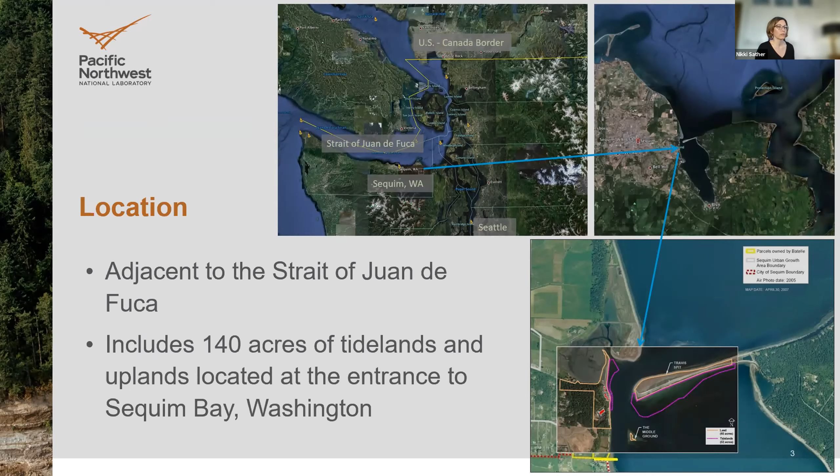Our facility sits on 140 acres, which includes 65 acres of tidelands. You can see in this inlet here, down at the bottom, this purple polygon shows our tideland coverage. Within the next year or so, we expect that DOE is going to purchase a lot of acreage here, about 117 acres, including the tidelands, and so that means the facility will be transitioning to a federally owned facility.

Our campus is made up of two different areas. The upland area sits on a bluff, about 100 feet above sea level. The shoreline facilities are built adjacent to the beach, and many of the facilities along the shoreline are relevant to supporting the marine energy testing that we do.

You will see in this infograph that we really consider the adjacent water body, this 5,000 acres in Sequim Bay, as part of our research platform. So we certainly do what we can to maximize this as a research space.

In terms of our staff, our numbers grow and contract, and that's certainly true in spring and summer when we see a heavy influx of students and visiting scientists. But on average, we have about 80 researchers on campus. We are a technically diverse group of folks, so our scientists include biologists, ecologists, engineers, chemists.

We have a number of indoor and outdoor capabilities that support our testing and experimentation. Our pier and our floating dock provide access to our vessels, but they also provide a platform for deployments that require data cables and other power needs. Our wet labs provide access to either freshwater or seawater that can be flow through or filtered. This is particularly relevant to things like biofouling and biocorrosion testing, scaled prototype testing, as well as component testing.

We use our dry lab spaces to support activities related to the design, test, and build of components, sensors, platforms. Our Arctic lab can be retrofitted to perform seawater tank testing under freezing conditions, and I'll share a few examples of that later on in the slide deck. And then lastly, we have a number of tanks of various sizes outside that offer opportunities for mesocosm experimentation.

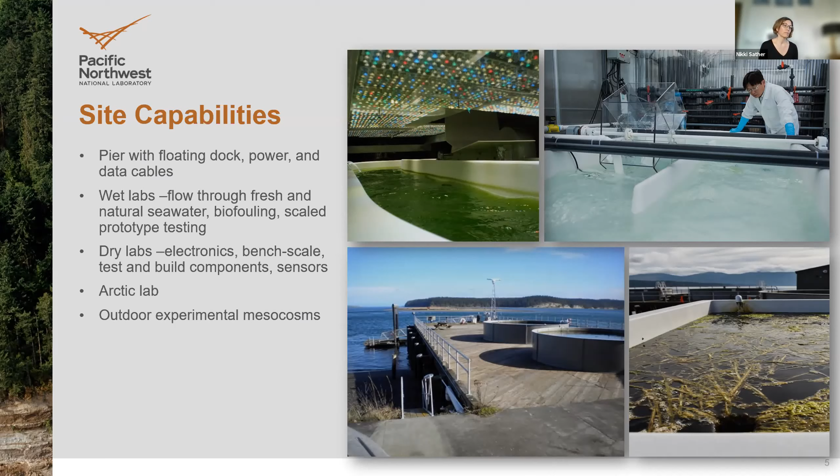We are in the process of adding several new capabilities to MCRL that I wanted to share with you today. We have plans to install a cabled array that will support deployment of equipment and devices that require underwater power, as well as data connection. You can see this illustration on the slide of the cabled array. It's going to be located close to our facility, which offers some inherent convenience. In addition, the location can accommodate opportunities for testing either in high current or not, depending on what the research needs are.

The marine energy battery storage system is being designed. It'll be located on our shoreline facility, and it will be designed to connect devices via that cabled array. You might think an example of that could be a turbine. However, the battery can also be tested independent of power generation, meaning various simulations and modeling.

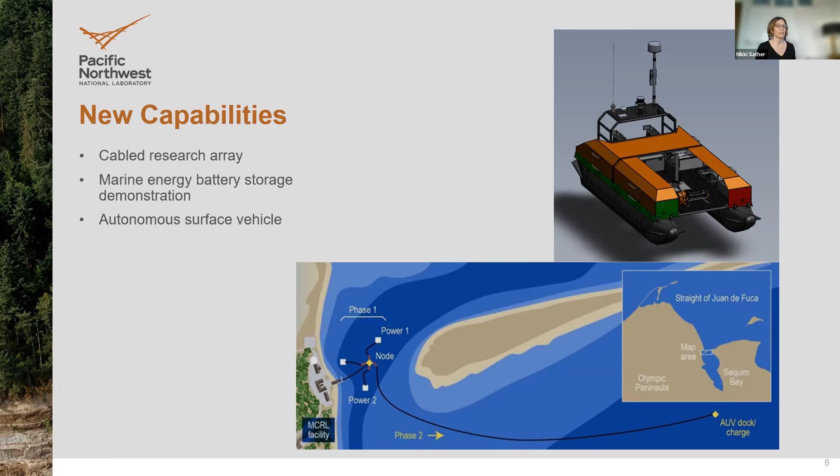And then lastly here, we have this autonomous surface vehicle. The rendition that you can see here on the slide is going to be designed as a testbed for autonomy, as well as a proxy for marine transportation—so testing of docking and charging capabilities, for example.

Our dive team is made up of scientists. This means that not only do they understand the technical aspects of diving, they have a deep appreciation for what it means to perform experiments and collect high quality data underwater. Of their many skills, I love that we highlight their ability to be cooperative research targets.

This means that, on request, they will pretend to be seals underwater, if you ask nicely. But really from a technical perspective, some of our divers are trained to use rebreathers, so they emit fewer bubbles underwater, and they can and have in the past served as underwater targets for different sensing technologies.

This image shows the mouth of Sequim Bay, which we refer to as the channel. Our lab is along the shoreline to the right. You can see Travis Spit is the sand feature on the left. Water depths in the channel range about 12 meters, and in the bay they're 32. Then as you move north out of Sequim Bay, depths increase rapidly in the Strait of Juan de Fuca.

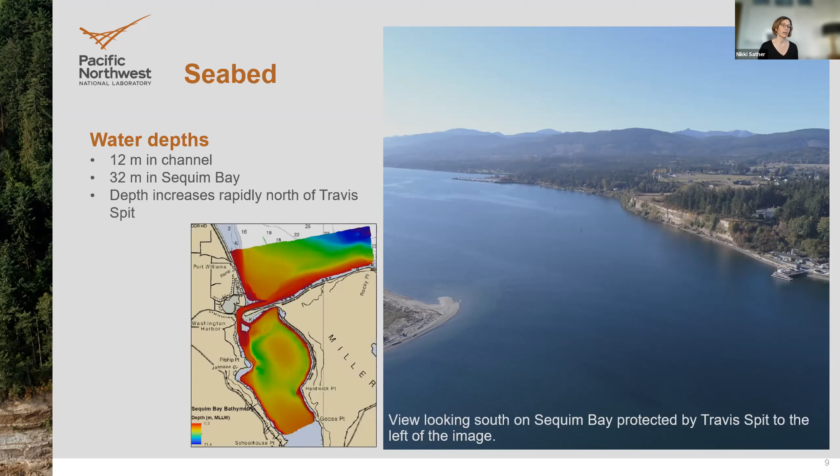These images depict the normalized velocity fields in Sequim Bay. The image on the left is velocity during flood tide, and the image on the right is velocities during ebb tide. Blue is slow, red is fast. Velocities can range anywhere from 0.5 meter per second to 2 meters per second, with instantaneous velocities being much higher. You can see from these images that the location, extent, and intensity can change depending on which tidal cycle you're in.

But there are some areas that are pretty consistent, an example of that is southeast of our dock. These data are useful to us because they help us design experiments and plan deployments. It means we can be dynamic in terms of how we deploy things depending on testing needs.

I would be remiss if I did not talk about permitting. We have 2 pre-permitted areas, one in Sequim Bay and one in Clallam Bay, which is to the west of us. The benefit of having these 2 sites that have federal authorizations and supporting permits is that it allows us to conduct a number of pre-approved activities with very little lead time. This doesn't mean that anything goes. What it means is that we have a general envelope of things that we are allowed to do. So when projects come in the door, we do some careful comparison of scope to what those envelopes are, we make sure everything is aligned, and once we've done this internal verification, we can move forward with testing.

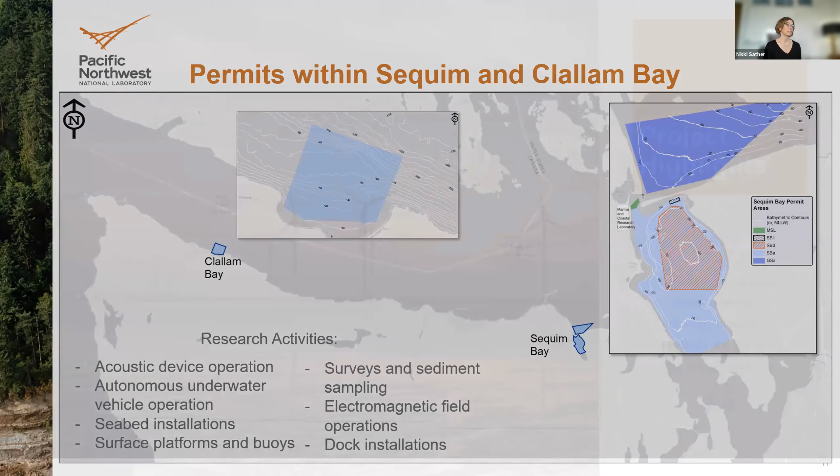I'm going to move on now and share a few details of our teams and our projects that are relevant to marine energy testing. My hope is to adequately amplify this research, but I think you're going to recognize that each one of these slides really could be a talk in and of itself. So I've included some list of names as POCs. If you're interested at a later date for more details, please follow up.

Our coastal modeling group supports marine energy testing and evaluation. Certainly wave and tidal resource characterization and assessment are a key focus area. Other applications of these capabilities include evaluating risks and uncertainty. An example of this could be coupling of hydrodynamic models with underwater acoustics to help with siting and permitting of devices. In the PBE space, these high resolution data sets are relevant to coastal communities and coastal resilience, think hazard assessments, for example.

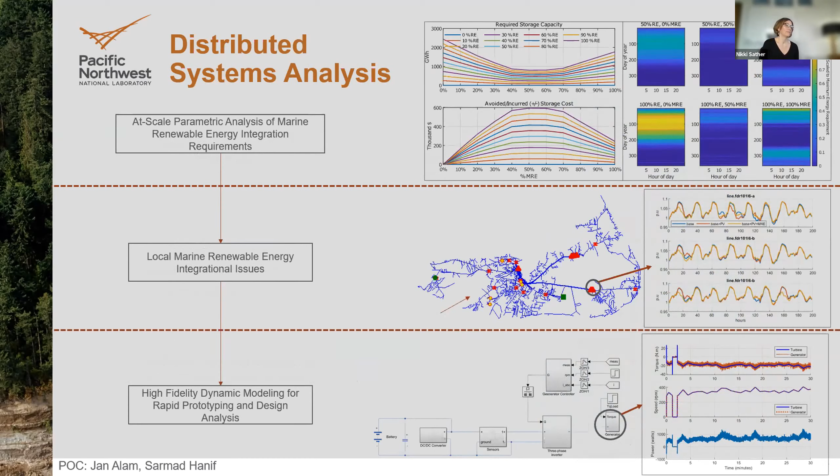PNNL leads the Ocean Energy Systems Environmental Program, which is built on collaboration with 16 nations under the IEA Ocean Energy Systems. I'm sure many of you are familiar with this work. This team brings together experts to disseminate critical information to the industry as well as regulators.

They use a variety of approaches. Some aspects of their work include workshops and forums that bring together experts. I believe there's one being held tomorrow as part of this conference. And of course, there's the State of the Science report, which has been released every 4 years since 2012.

Triton is the DOE initiative that's designed to support environmental monitoring technologies. Ultimately, the goal of this work is aimed at helping reduce barriers for marine energy deployment. This team has been incredibly busy this summer, out and about doing field testing. They're focused on developing deployment methodologies for marine energy applications, offering a range of expertise in testing and deployment in open water, including at marine energy test sites.

So Matt talked about TEAMER earlier. PNNL is supporting the TEAMER program through a couple of different means. We perform modeling and desktop analyses, bench testing, tank testing, and we are looking forward to open water testing that will soon be added. So currently we are working with developers to understand environmental compliance needs relative to specific device types.

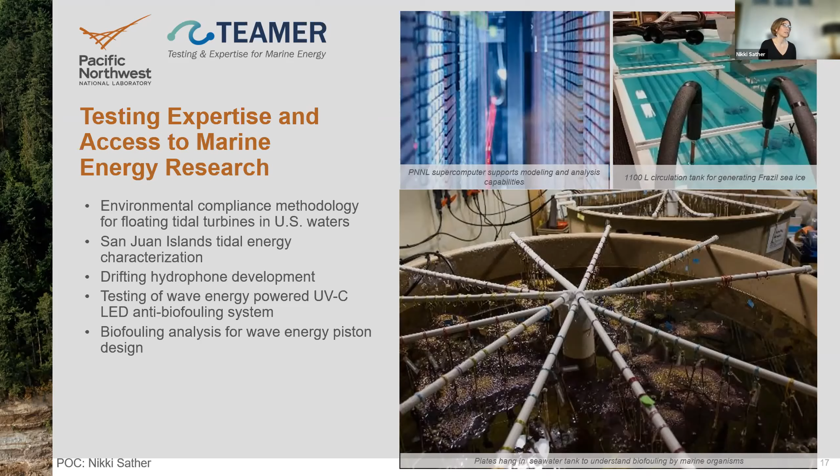I wanted to close with some examples of additional marine energy relevant tests that have occurred at MCRL as of late. These capture our in-water research activities as well as our tank testing. In support of resource characterization work, we recently ran an experiment to evaluate the potential interference of two different ADCP systems running at the same frequency and within close proximity, and that work was done here in Sequim Bay.

In our Arctic lab, we conducted an experiment focused on evaluating the effectiveness of different lithium-ion batteries in freezing conditions. We were interested in determining if wave energy is a more effective way of charging batteries than solar in ocean-based observing platforms in cold climates. We combined this lab experimentation with simulations to evaluate the effectiveness of wave charging.

We also conducted an experiment on polycrystalline diamond bearings as an alternative to steel bearings on marine energy converters. Again, we used our Arctic lab to perform this test, and you can see an image from that experiment on the right here, an ice slurry in the tank. Things were fully functional above that first layer of ice. That test has wrapped up its first phase and is moving towards phase 2 of testing.

In support of the Splash contest for the Ocean Observing Prize, we recently installed a wave measurement buoy at Clallam Bay. We're looking forward to the data that will be collected there. Finally, we have used JSATS tags, an acoustic tag technology developed at PNNL, to track sablefish movement in Sequim Bay. The 3D tracking work was done in support of efforts to develop approaches for reducing uncertainty regarding fine-scale movement of fish in and around turbines.

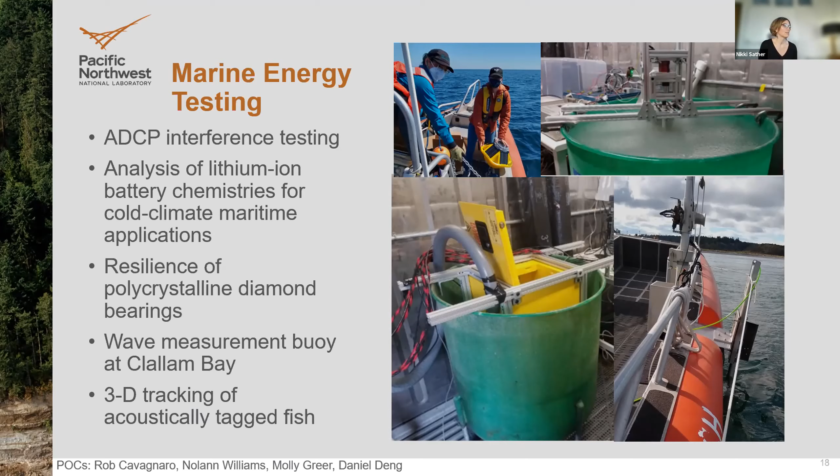So with that, I will wrap it up and say thank you. Thanks to Matt for having us here today, and maybe I'll turn it over to, I think, Bryson's next.

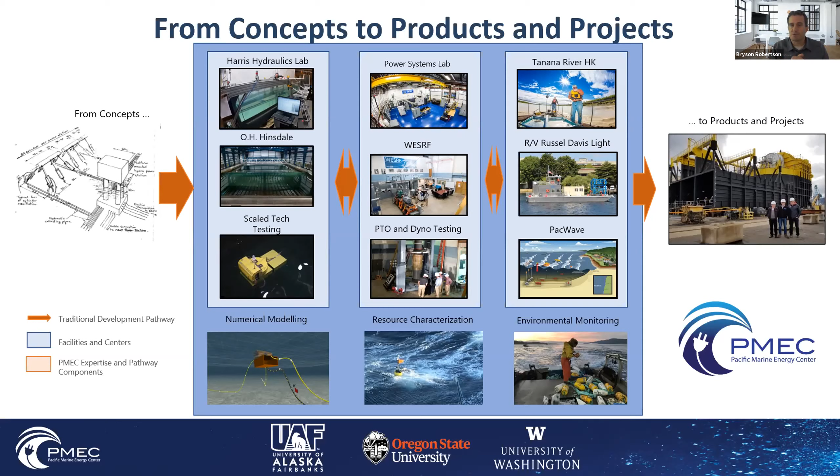So where do we start? Generally we go from our napkin drawing and we move to our computer model.

We've got a huge amount of people and different models we can bring to bear on this problem. I'm not going to get into all the details, because then my 10-minute talk will take 2 hours, but there's a lot of capability and expertise there.

In terms of physical testing facilities that often get the high-level attention across the center, we've got a number of them, whether you're looking to test floating wave energy converters, seafloor-mounted wave energy converters, or tidal devices.

The O.H. Hinsdale Wave Research Laboratory on the left here was established in 1972, and it's a state-of-the-art center conducting both applied and fundamental research.

There are 2 big facilities within Hinsdale, both the large wave flume and the directional wave basin, allowing marine energy technology developers to subject their scaled devices to waves, extreme seas, storm surge, and a host of other environmental factors. There's a number of different things on the TEAMER website.

I'm not going to get into the specifics of each one, but we can go from deep conditions with big waves to directional waves in the other basin, allowing you to test really what you're looking for.

There's actually a group of students who just finished a tour of the O.H. Hinsdale Wave Research Laboratory this morning, where Aquila Power, funded by the TEAMER program, is testing an array of 7 Triton devices.

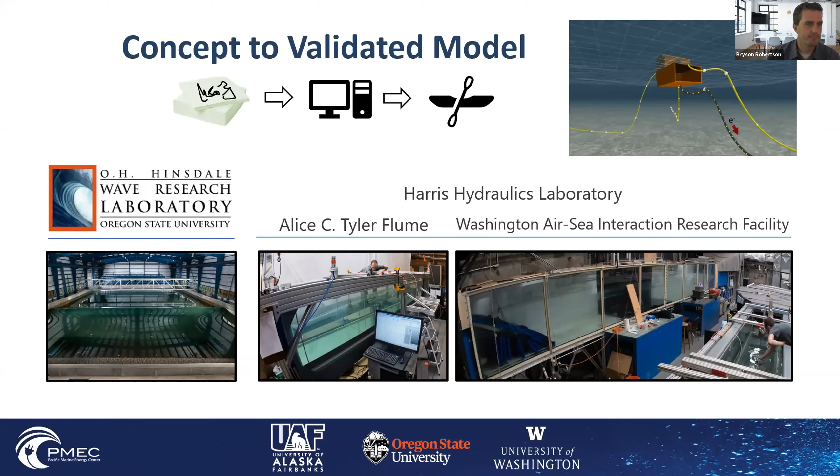Where's my mouse? My apologies, I can't move my slide deck forward.

There we go. As we get through those small scale tests, we start to understand the hydrodynamics, and we start to get some of these results.

Then we need to start to look at individual components and how they integrate with the greater system, whether it's the utility grid, a remote community, an oceanographic buoy, or an underwater vehicle. How do these systems start to work together?

Under the PMEC umbrella, we've got 2 major facilities that we operate: the Wallace Energy Systems and Renewables Facility at OSU, and the Power Systems Integration Lab at ACEP, the University of Alaska Fairbanks.

We serve as one of the highest power university-based energy system labs in the country, with about a 750 kilowatt capacity. There's a number of really great linear test beds, batteries, storage technologies, and hardware-in-the-loop hardware, which really allows that team to move component integration testing forward.

They also have a lot of ability in converter modeling, control development, and power takeoff design, so you can start to see the connection between your components and the testing that happened in the first stage of the modeling.

At ACEP, this facility operates at the same scale as a village power system. So if you're looking to power a remote community or get your device in, this is the scale you're going to be working at, and you can do it in a controlled environment.

So before you go out to the site and have that sort of potentially chaotic field testing setup, you can go to the Power Systems Lab and, in a controlled and flexible setting, start to understand how islanded and microgrids work, and how your distributed generation scenarios play out. Incredible facility.

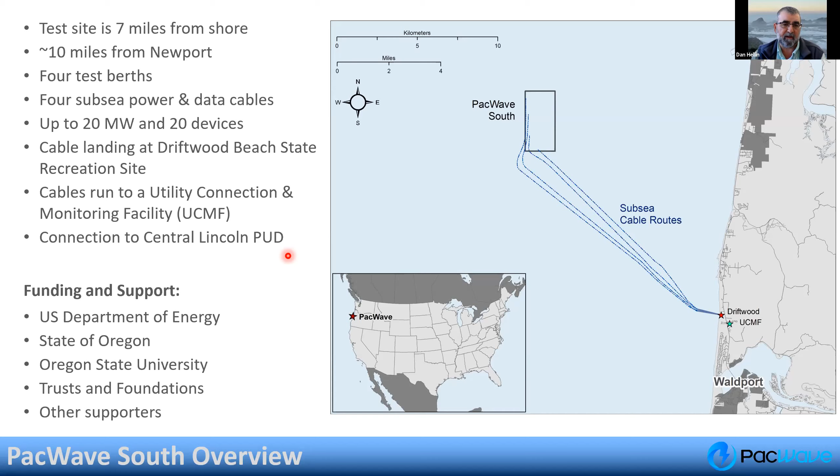Part of the reasoning why this permitting took a significant length of time was partly because we're a test site, so it's very difficult to define what we're going to have out there at any time, and that's complicated for the permitting. Also, similar to what Nikki was talking about, we are pre-permitted for the majority of types of wave energy converters. That doesn't mean we can just go out and do anything, but the majority of types of WECs will not require additional federal permitting to come and test at PacWave. That was an unusual requirement in our permitting and took a long time to hammer out, but we feel that's definitely going to be important for developers.

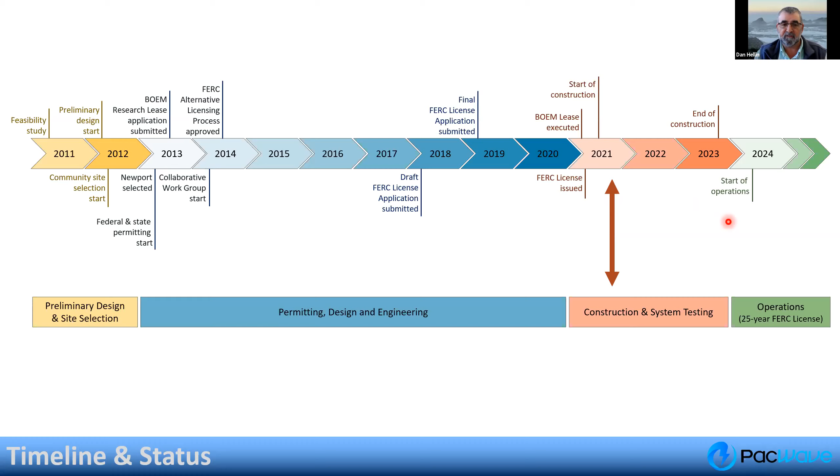I just want to talk a little bit about the construction, where we are and what's going to be happening. We have a couple of early phases of construction underway at the moment. At our cable landing site at Driftwood, there's major construction for our terrestrial infrastructure going on, the horizontal directional bores. That started on June 1 and will go through until early next year, spring of next year. At the same time, we have initial work starting on our utility connection and monitoring facility.

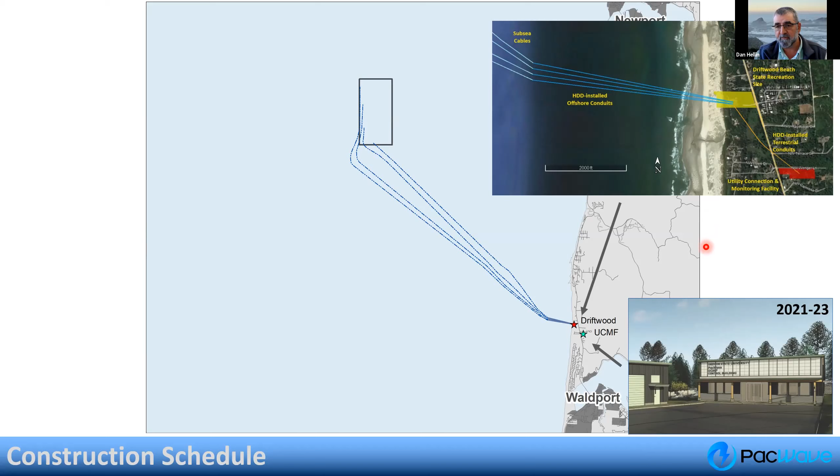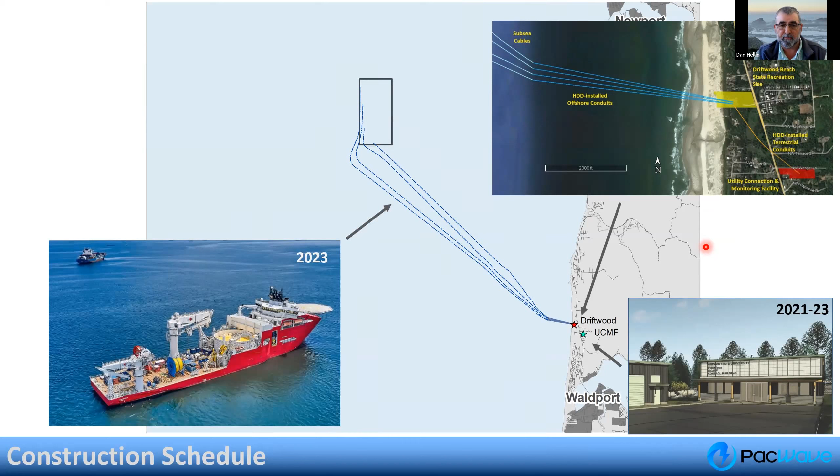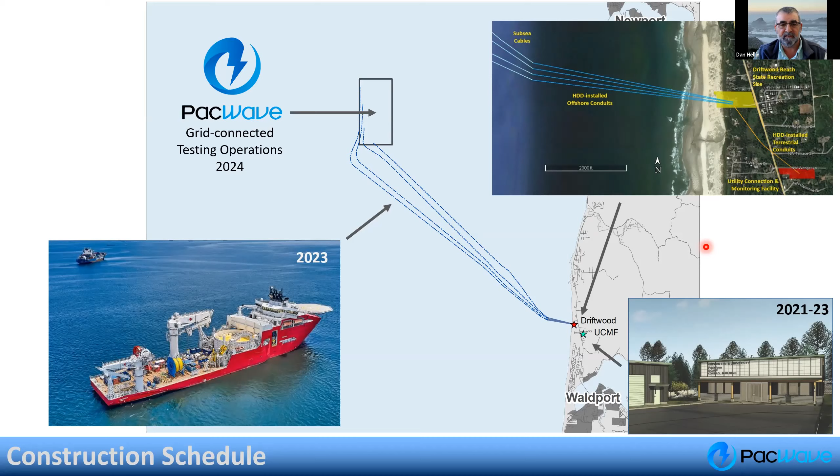What we're doing at the moment is site preparation, upgrading utilities, roadways, grading the site in preparation for the actual construction of the facility itself, which will likely happen in either 2022 or 2023. The real big piece of the project scheduled for 2023 is the subsea cable installation. Subsea cable manufacturing will probably happen next year in preparation for a 2023 install, which will lead us to test operations for grid connected testing in 2024. Other testing can happen in advance of that, but grid connected testing will happen once we have all the cables in place.

So to talk in more detail about the terrestrial infrastructure work that's going on: we're based at Driftwood State Park, started on June 1st, and the major undertaking at the moment is these offshore bores. These are horizontally directionally drilled bores, each going out approximately a mile from shore. The longest bore, the north bore, is 5,308 feet. These bores get lined with steel casing, steel conduit, which will be left in place, and that's what we're going to pull the subsea cables through when they're installed in 2023.

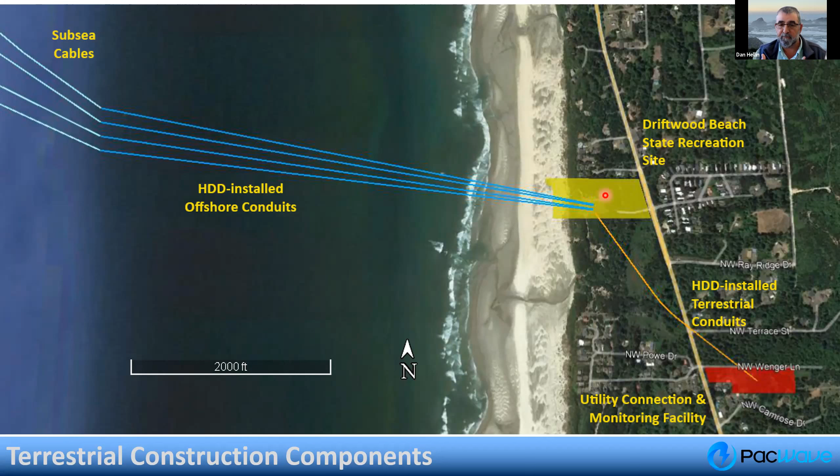So we're currently working on these bores. We have the conduits installed on the north bore HDD1 and the south bore HDD4, and we're currently drilling on HDD2 and HDD3. When those bores are all complete later this year, maybe late next month, we will switch to doing a terrestrial bore between Driftwood and the UCMF facility. And when that's complete, we will rebuild the parking lot at Driftwood and build an underground splice vault where the subsea cables will come in and transition to the terrestrial cables.

So this is a profile of the horizontal directional drill bore plan that's going on at the moment. These are long bores - a mile long bore offshore is a pretty extreme bore to do. What we have here is the parking lot at Driftwood, and the bores go down underneath the beach and the nearshore area and down into this competent rock, this Nye mudstone, that they drill through for most of the bore path offshore, at times about 140, 150 feet below the seafloor, until they curve up and break out about a mile offshore.

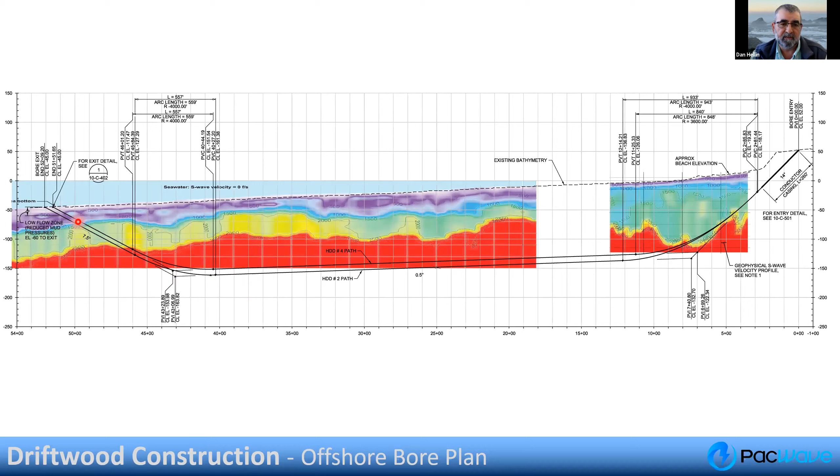Once they've done the bore, then we pull the drill string back and then install all the conduit. So this is from a couple of months ago - this is Driftwood State Park, the parking lot, Driftwood Beach here. There's a pathway down to the beach. We've maintained pedestrian access, even though we've taken over the whole parking lot for the duration of the construction.

What you can see here is two very large drill rigs, horizontal directional drill rigs, in operation. We have two running at a time. In this picture, we have HDD4 heading out this way and HDD1 heading out this way. At the start location, they're located pretty close together - the separation between HDD1 and HDD2 is approximately 8 feet, and the separation between HDD4 and HDD3 is about the same. But the bore paths are diverging, and offshore their breakout points are about 150 feet apart.

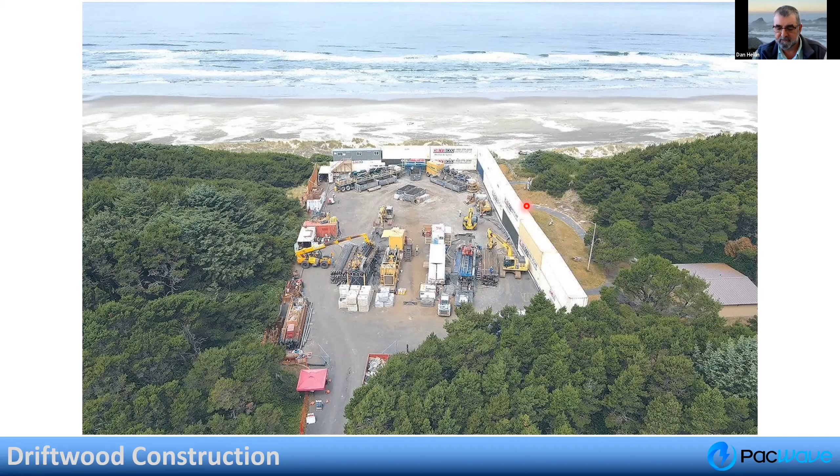Because this coating is critical, protecting it has been quite an interesting challenge for the company during installation, to ensure we can screw all these sections of conduit together without damaging that coating before it's installed. So as I said, HDD1 and HDD4 are complete, and of the other two bores, one is at about 2,400 feet out, and the final bore is at about 1,500 feet as of yesterday.

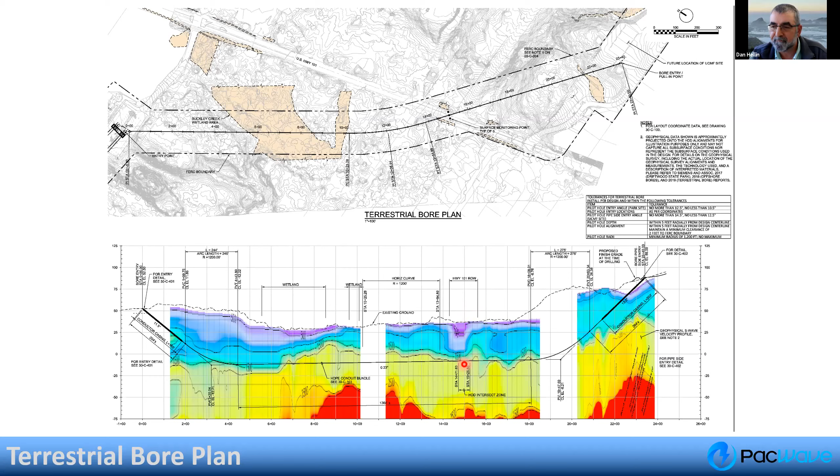So the drillers are actually incorporating an intercept method, drilling one bore from one end and one bore from the other end, intercepting underneath the highway here. The accuracy of their drilling is pretty remarkable. The reason for that bore is to get the power from driftwood to our utility connection and monitoring facility.

This is our architect's rendering of the UCMF facility. This was done by HGE Architects, the company we hired, based out of Coos Bay. As I said before, this will probably be constructed in 2022 or 2023.

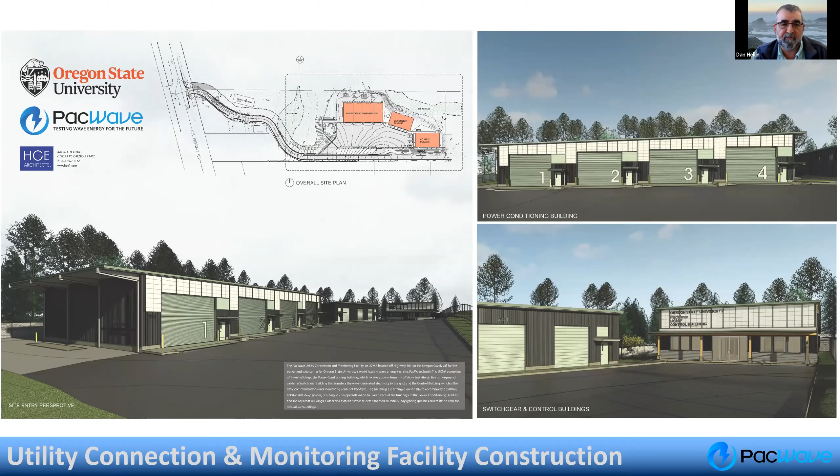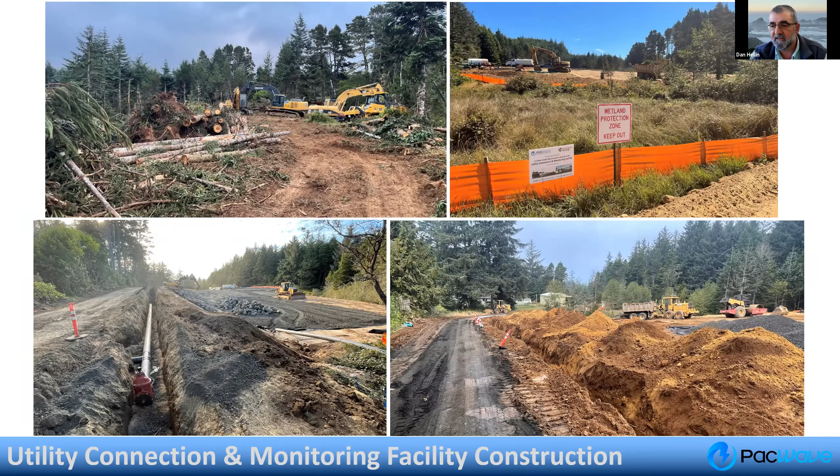The site itself was a Christmas tree farm, so we're focused now on clearing the site, grading—this is actually the location of the facility itself—and improving roadways and putting in all the utilities in preparation for ultimately the construction of the site, the installation of the cables in 2023, and the start of operations in 2024. So that's where we are at the moment.

It's exciting to actually be underway and in that construction phase. Plenty more information about PacWave and about the construction at pacwaveenergy.org. And with that, I will pass it back to Matt.

Thanks, Dan. Fantastic to see the progress. I'll start with a quick question straight to you. I know you gave myself and the POET team a great tour of the drill site. Obviously we have very high level access, VIP access due to—I'm just kidding. Is there opportunities for the public to come and see what's going on there? Is there any upcoming tours or meetups, or can they reach out to you if they're interested?

If people are interested, they can reach out to me. We did have an open house a month or two ago, really aimed at providing some access to the locals, because they've lost their state park and there's a lot of noise and disruption going on. We don't have any set tours at the moment because, as you can attest Matt, having been there, it's a pretty active construction site with a lot of equipment moving around and a lot of people on site working. But if people are interested in a tour, they can reach out to me—I'm on site pretty much the whole time and quite happy to show people around.

Yeah, your office likely has the best view out of anyone I've seen lately—well, in one direction at least. Funny story, I was walking down the street the other day and saw one of my neighbors having a new water line installed to their house, doing some directional drilling. So I actually went up to the guys and gave them some tips from what I learned on my tour at PacWave. They didn't care.